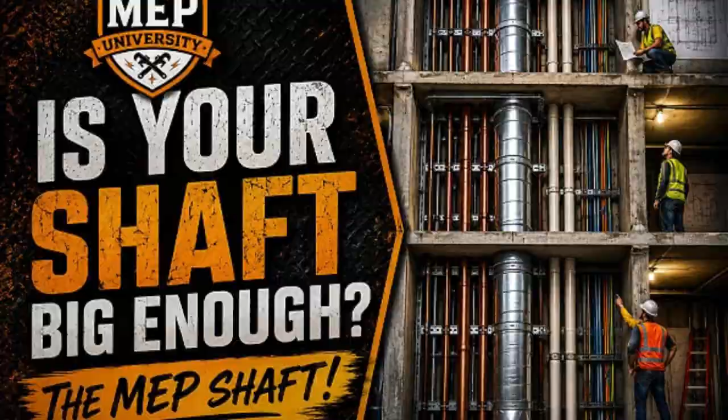You think your shaft's big enough? It's probably not. Stick with me and I'll walk you through the 5 biggest mistakes contractors and designers make when they plan MEP shafts in buildings.

Before we get going, let's talk about what a mechanical or utility shaft actually is. A shaft is a vertical opening in a building that lets mechanical, plumbing, electrical, fire protection, and other systems run from floor to floor. On big commercial projects, these shafts turn into some of the tightest, most fought over spots in the whole building. The first challenge is just figuring out what the shaft is supposed to really look like, and the information is scattered all over the place.

Architectural, structural, mechanical, plumbing, electrical, fire protection drawings, plus the BIM model. And here's the problem. They don't always match. The architects might show one shaft size, the mechanical engineer might show something different, the electrical engineer might need even more space than what's shown on any of the drawings. And I can almost guarantee you one thing, whatever's shown on the structural drawing is exactly what the concrete contractor is going to frame up and pour.

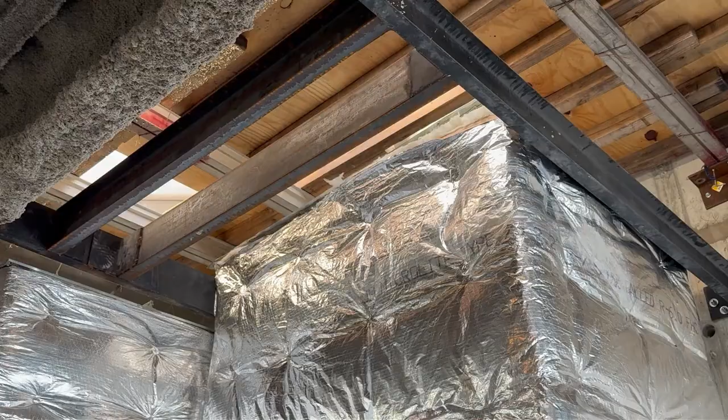So if that opening is wrong, too small, or missing the support it needs, you're going to be living with that problem for the rest of the project. That's why PMs, foremen, superintendents, and coordinators need to start reviewing shafts really early. They need to check the drawings, check the model, verify slab openings, and make sure that what's being designed can actually be built. So let's dive into the 5 biggest mistakes contractors and designers make when they plan and install MEP shafts.

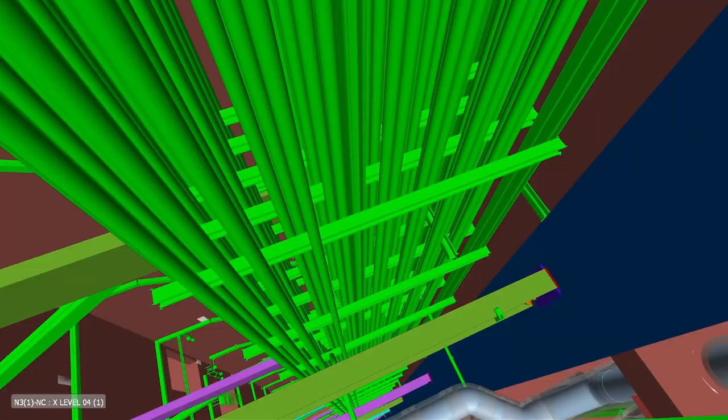Mistake number 5. Nobody plans for the shaft steel. On a lot of large commercial projects, the engineer will lay out the piping, the ductwork, and the conduit in the shaft in the model, but very little thought goes into what all this stuff is actually going to sit on or hang from. A lot of times the shaft steel isn't even shown at all. The design team may not have coordinated it with the structural drawings.

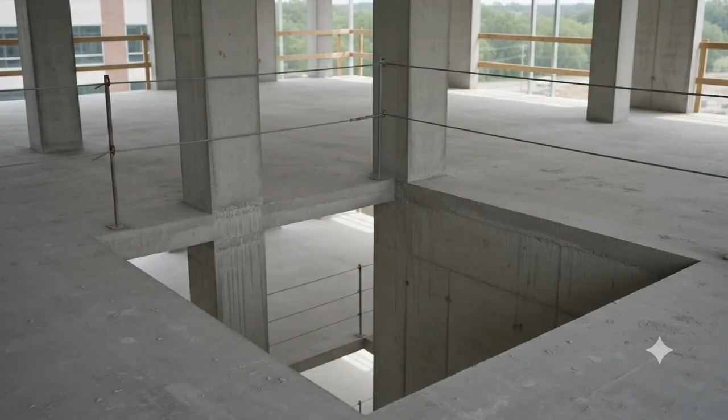They may not have calculated any of the weights. They may not have even calculated the insulation thickness or fully realized that the mechanical, plumbing, electrical, and the fire protection are all sharing the same space. And then construction starts. Now, somebody has to figure out, how much steel do we even need? Who's going to design it? Who's paying for it? Who's going to fabricate it? And who's going to install it?

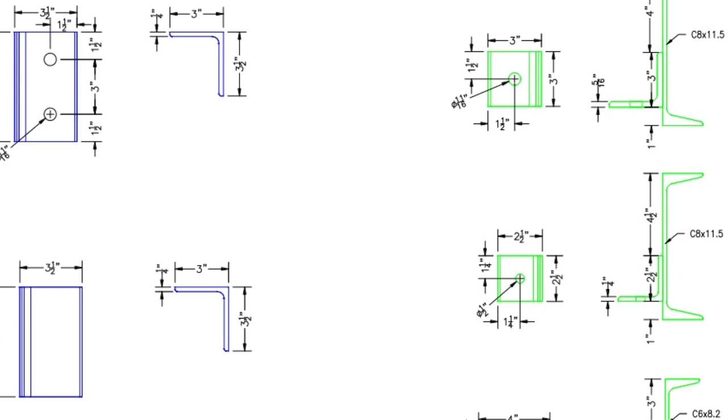A lot of the specs push this onto the contractor through what they call delegated design. Miscellaneous metals rarely carries it in their scope, and the GC usually will just tell you it's yours. And all of a sudden you're chasing engineered drawings and stamped calcs that should have been talked about months ago. Now that steel has to be sized, loaded, and it's going to probably hold thousands of pounds of pipe, duct, conduit, and sometimes even has to be sized enough to have vibration isolation sitting on it.

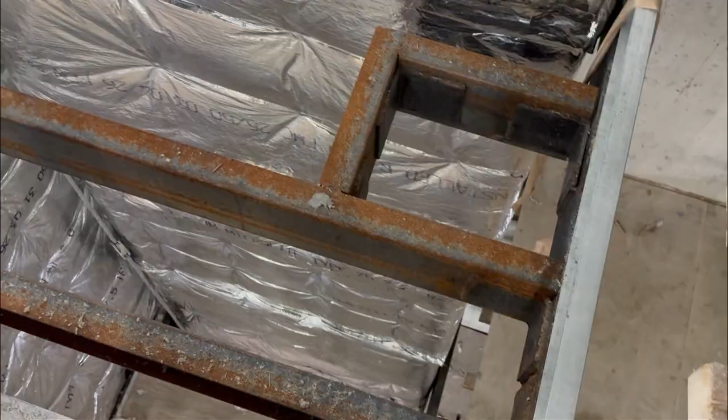You've also got to go figure out, do you need embeds in the concrete? Is the slab opening even big enough to take the steel? Will the support steel even fit through the opening? What loads will the support see? Can unistrut handle it, or do you need angle iron, maybe C-channel, or maybe even structural steel?

And here's the bigger problem. What if the slab opening really isn't big enough? What if you need embeds cast into the concrete? What if utility weights call for bigger members than anybody's planning for? Those are questions you don't want to be asking after the concrete's already poured.

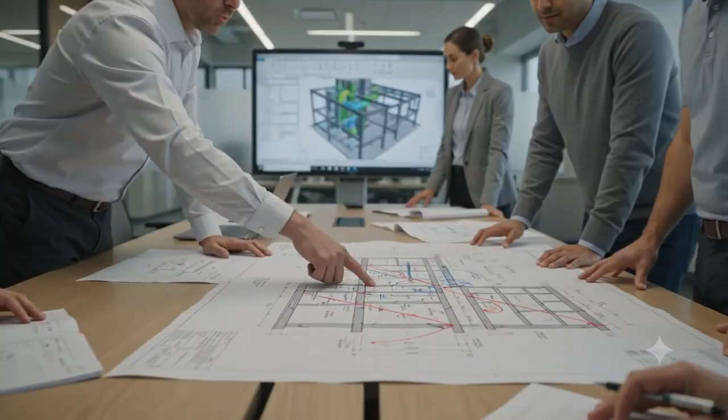My advice is, get your drafters and engineers looking at the shaft support requirements as early as possible. Even if the final design isn't done, you need to understand the concept, the loading, and the space it takes before the building even starts going vertical. Everybody coordinates the utilities. Very few people coordinate what the utilities are going to be sitting on.

Mistake number 4. Nobody plans for the fire-rated enclosures. This one gets overlooked all the time. The engineer will lay out grease duct in the shaft and everything looks great in the model or on paper. The BIM model says it fits. The shaft dimensions work. Everybody moves on, and then construction starts. The grease duct goes in and somebody realizes it still needs a 2-hour fire-rated enclosure around it.

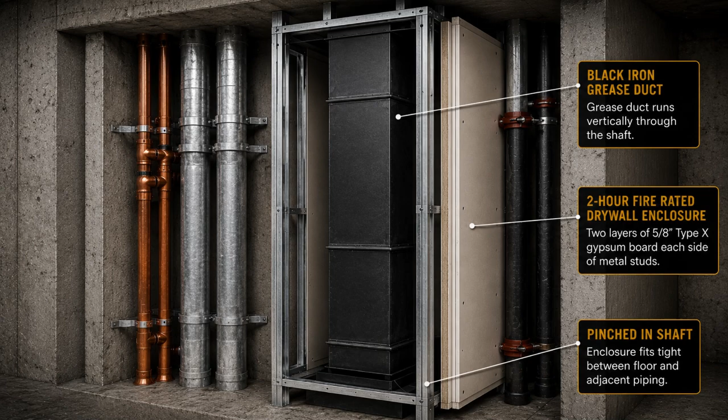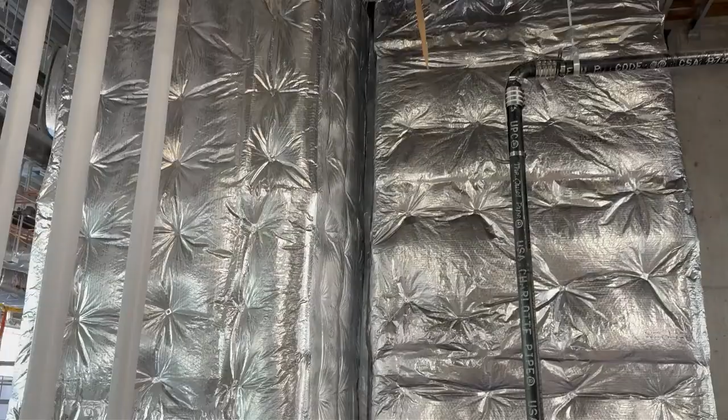Sometimes that's fire wrap and sometimes it's a drywall shaft enclosure. And a lot of times, neither one was shown fully or accounted for in the original design. Now, that duct looks fine on paper, but it suddenly needs extra thickness, support, framing, room to install it, and inspection clearances. I've seen shafts so tight you couldn't even get your hands around the duct to install the fire wrap. The duct fit, the fire wrap didn't.

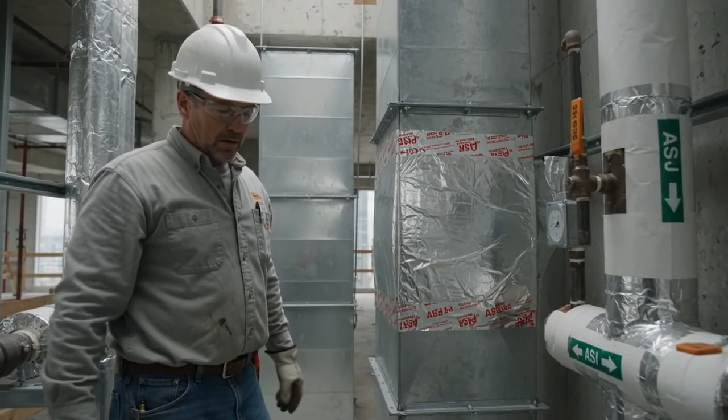And when a drywall enclosure is required, it gets even worse. Now you need framing, drywall, extra clearances, inspection access, and room for hangers and supports. The problem isn't just the enclosure itself. The problem is nobody accounted for the finished assembly. What looked fine on the plan can be impossible to build in the field.

My advice? Don't coordinate the duct, coordinate the finished assembly. The inspector isn't approving the duct, he's approving the complete fire-rated system. Don't just model the duct, model the finished product, whether it's fire wrap or drywall.

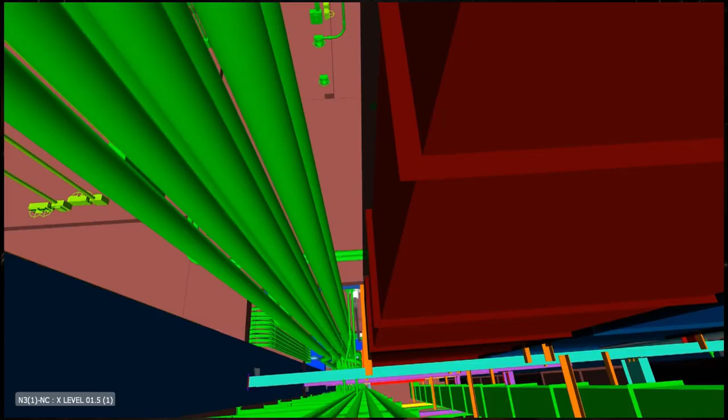Mistake number 3. Nobody thinks about vibration isolation. This one catches a lot of mechanical teams off guard. The engineer lays out the piping and everything looks fine inside the shaft. The BIM model looks good, the clearances look good, everybody moves on. Then somebody starts reading the specs and realizes the piping requires vibration isolation.

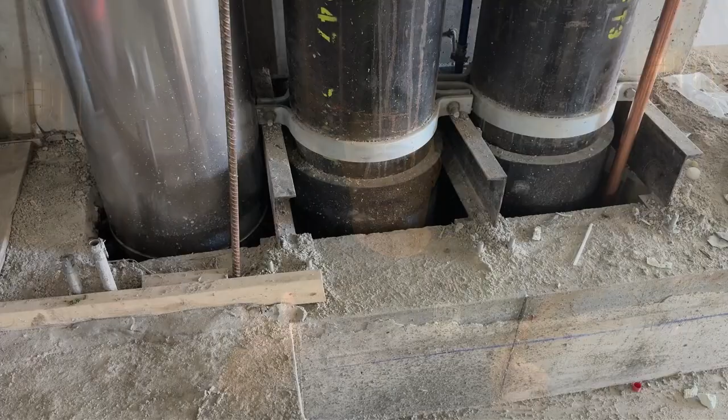Now the spring hangers need space, the isolation hardware needs space, the support steel might have to be modified, and all of a sudden that shaft isn't quite as roomy as it looked during design. The pipe fit, but the vibration didn't. The problem is a lot of teams coordinate the utility itself, but they don't coordinate everything that it takes to support it. Those spring hangers take up a lot of space depending on the size of the pipe.

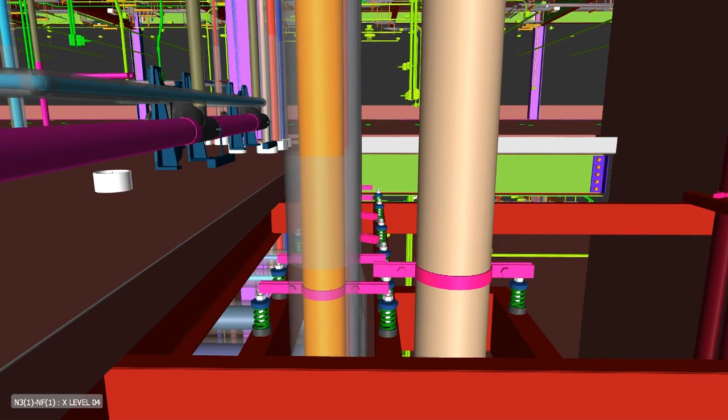Seismic restraints can take space, trapeze hangers can take space, support steel itself takes space, and all of it has to live right alongside the plumbing, mechanical, electrical, and fire protection sharing that shaft. I've seen shafts where the pipe technically fit, but once the vibration isolation went in, the space disappeared quick. So my advice for this one is don't stop at the drawings. Read your specs. A lot of the biggest shaft coordination problems aren't hidden in the plans. They're actually in the spec book.

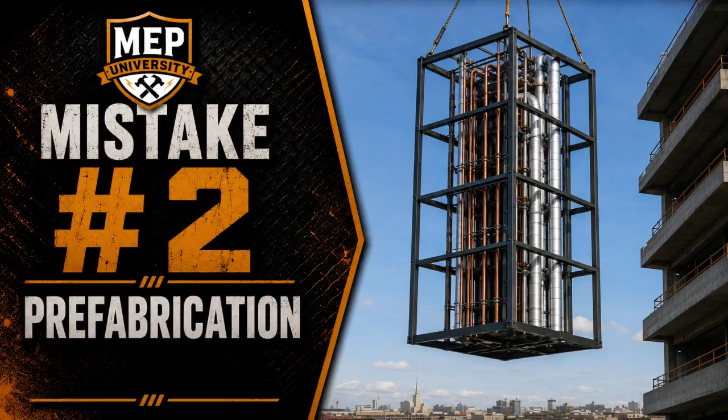Mistake number 2. Nobody thinks about prefabrication. When most people look at a shaft, they assume everything has to be built one piece at a time in the field. But that's not always true. Prefabrication doesn't have to mean building an entire shaft assembly. Sometimes it starts with something as simple as making your riser sections longer.

Let's say you're in a building that's a 20-story tall structure. Would you rather install 21-foot sections of pipe or 42-foot sections of pipe? Double the length and you've just cut the number of welds or couplings or joints and inspections nearly in half. It's a huge labor savings.

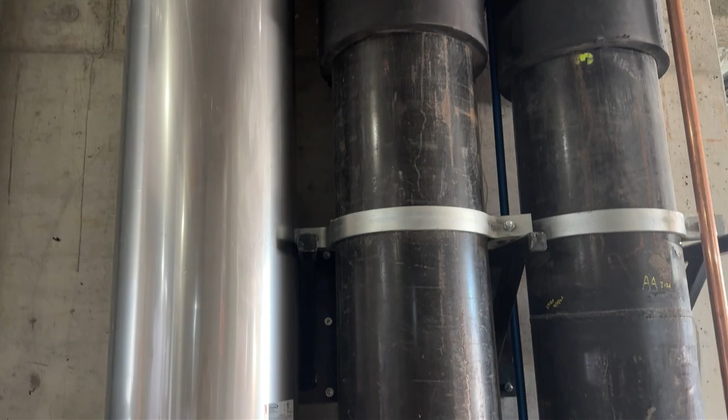Could you weld a few sections together on the ground and fly up bigger assemblies into place with the crane? Absolutely. But now you've got rigging, hauling, lifting, and logistics to plan out. The point is to think about prefab early. With enough planning, a lot of shaft assemblies can be built and set as bigger modules.

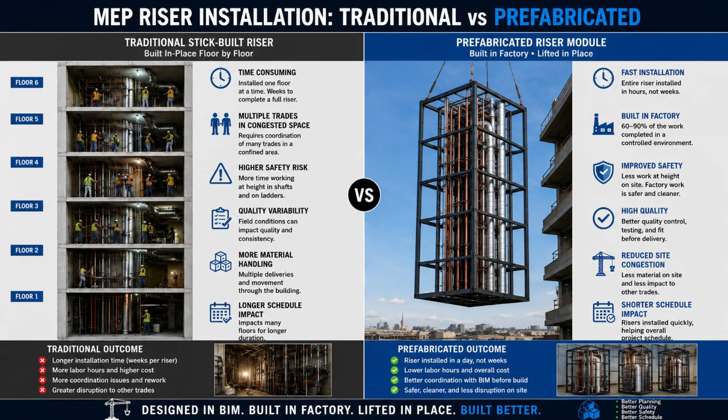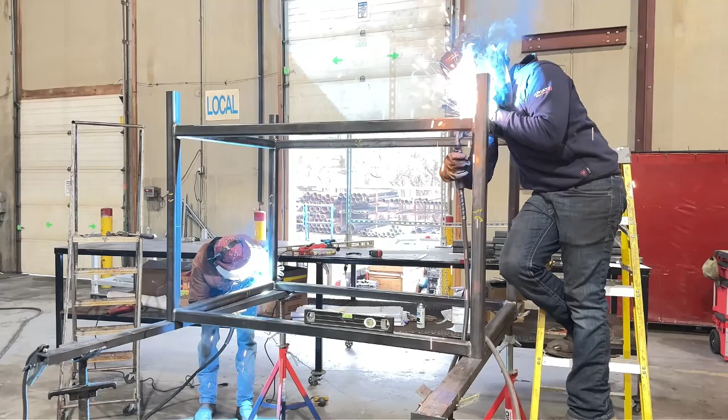I've seen contractors actually build complete riser assemblies, the pipe, the duct, conduit, supports, and structural framing in a fabrication shop and ship it to the site long before the building was even ready for it. Once the assembly was built, tested, inspected, and ready to go, they lowered the whole riser into the building and tied it off at each floor with the tower crane. To somebody walking by, it looked like the shaft went in overnight.

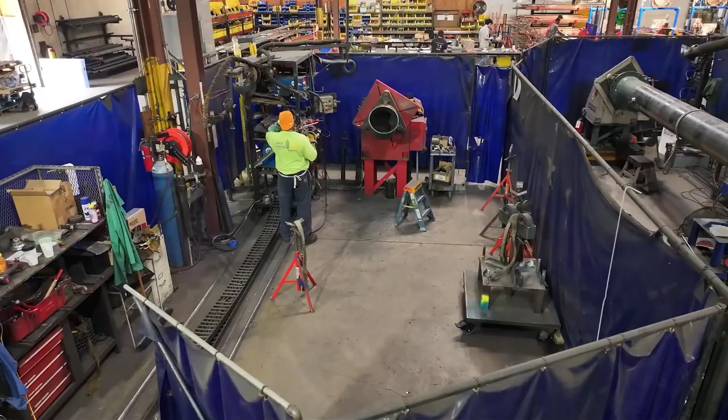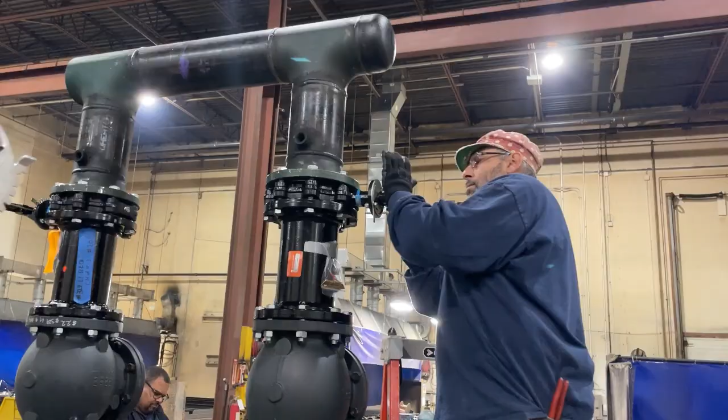But really, there were months of fabrication, quality control, testing, inspections, and a lot of coordination happening in a controlled shop long before that assembly ever showed up on site. That's the power of prefabrication. You're pulling labor out of a crowded shaft and putting it into a controlled environment where productivity, safety, and quality are usually a lot higher.

But prefab isn't free. It takes planning. Somebody's got to engineer the structural cage, design the assembly so it can be picked up by a crane. You've got to think, how am I going to haul it there? You need a rigging plan. And usually you need buy-in from the owner, the inspectors, and the GC before you can even move forward. Prefab may not make sense on every project, but it should always be on the table.

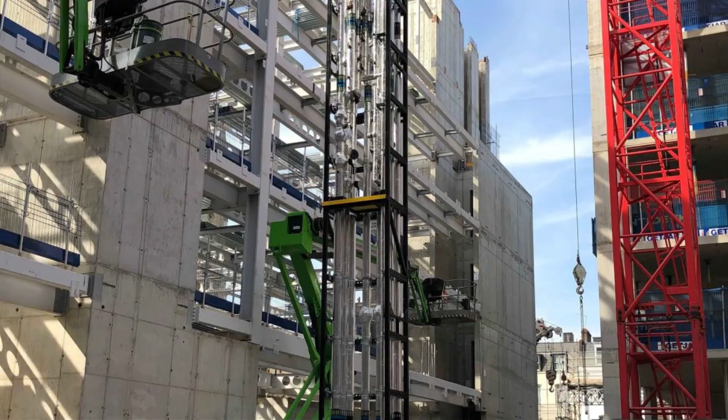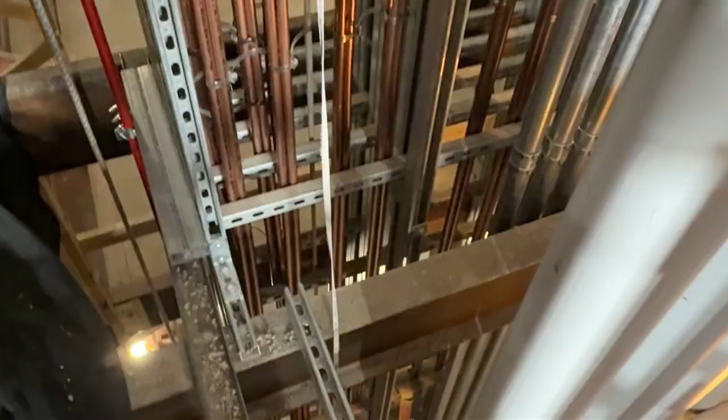Even if you're just prefabbing sections of pipes or prefabbing the supports or maybe some of the sections of the duct, every single hour you pull out of that field and put into a controlled shop buys you productivity. My advice is, at least ask the question, can this shaft be fabbed? Because if the answer is yes, you might save a lot of labor, cut the schedule risk, raise your quality, and even save a lot of money in the long run. Sometimes the fastest way to build a shaft is not to build it in the shaft at all.

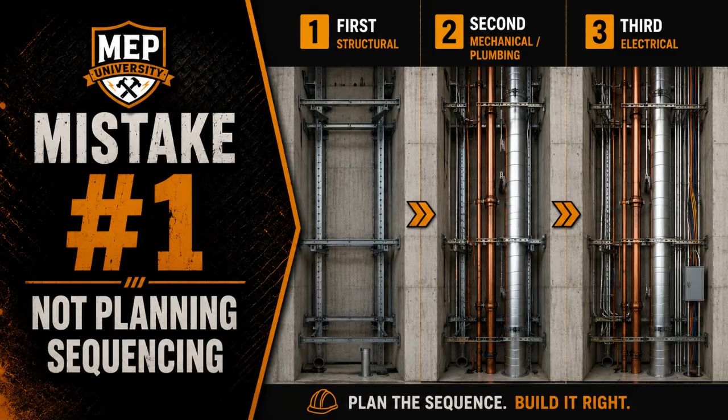And finally, mistake number 1. Nobody thinks about sequencing. And in my humble opinion, this is the biggest one of them all. Most people look at the shaft and ask, will everything fit?

Experienced teams ask different questions. How are we actually going to build it? The challenge isn't really fitting the utilities into the shaft sometimes. The challenge is understanding how long each step takes and what depends on what.

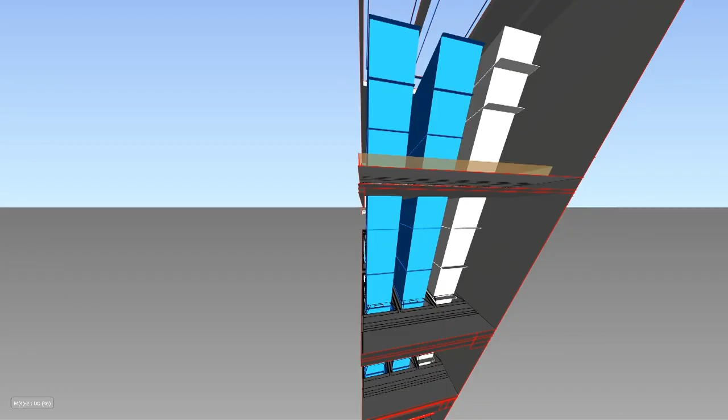Let's say your plumbing and HVAC risers run all the way from the bottom of the building to the roof. Those systems usually have to be fully installed before you can pressure test them. Depending on the size of the project, testing a riser can take days or even a week or more. And while that's happening, other work has to wait.

Same thing with grease duct. A lot of jurisdictions require grease duct risers to be light tested before they're accepted. If the shaft gets really crowded with other utilities before the testing's done, the whole thing gets a lot harder. And once the shaft gets crowded, installing fire wrap, insulation, supports, and everything else gets even tougher.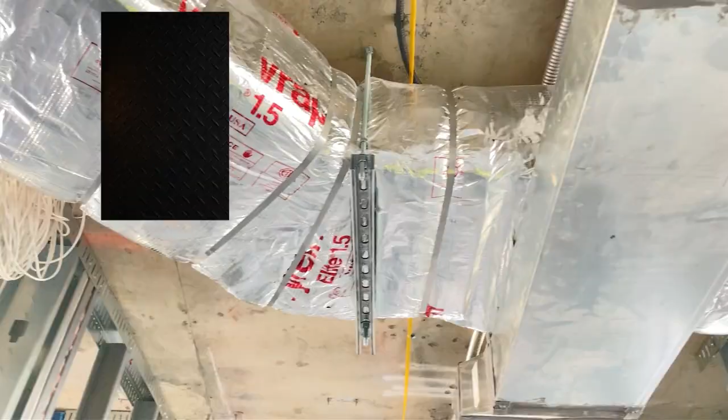I've seen grease duct that required 2 layers of fire wrap with metal banding every 12 inches. And that means the installers need enough room to physically get their hands around that ductwork to do the work. And if the shaft's too tight, what looks good on paper can be impossible to build.

Sometimes the duct isn't wrapped at all. Instead, it needs a 2-hour drywall enclosure. Now you're adding framing, drywall, taping, mudding, fire caulking, and plenty of inspections. And a lot of times that enclosure has to be done before the next trade can even start their work.

Same goes for insulation. Duct and piping insulation usually can't even start until the testing's complete. And if the shaft isn't protected from weather, that insulation's either going to get wet or it has to wait to be installed till later.

A lot of duct sealants are specified on jobs to be low VOC water-based. That means if they get wet from rain, they wash right off, and the building's not usually dried in that early on the job. So that's why temporary roofs, weather protection, waterproofing plans, they need to get talked through early with the GC before you even start working on those shafts.

This is where projects get into big trouble. One trade isn't waiting on another trade to install their work. They're waiting on them to install it, test it, inspect it, wrap it, insulate it, and then finish it. Those are very different durations.

I've seen GC schedules that assume every trade's working in the shaft at the same time. In reality, a lot of shafts have to be built one trade at a time. If you don't plan the sequence right, you can end up with a shaft that can't even be built. So how do you avoid that?

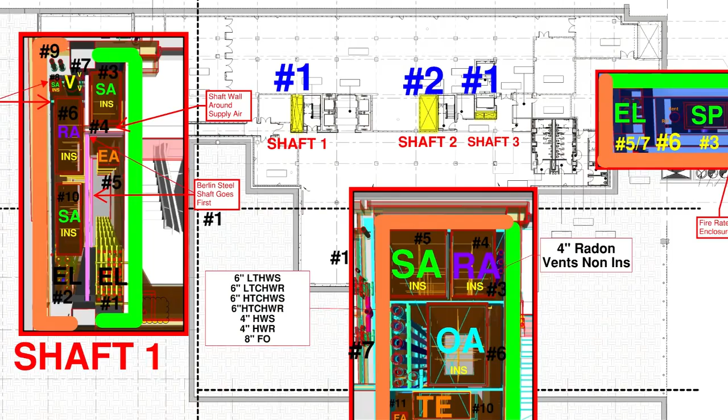Well, on this project we're looking at, we actually used the BIM model and the floor plans to map out how we thought the shafts would actually get built. We figured out which utilities went in first, which systems needed to be tested, which ones needed to be insulated, and where each trade needed access through that whole installation process.

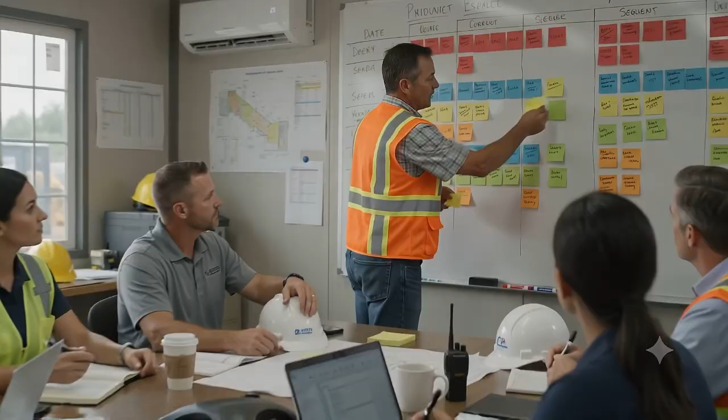But the model was really just the first step. After we built the sequence, we held pull planning sessions with the GC, the foreman, and the trade partners to nail down real durations for each step of those shafts. How long would the testing take? How long would inspections take? How long would insulation take? When could the next trade safely get into that shaft while we were still working or finishing up our work?

Those pull planning sessions helped us coordinate not just how we were going to build these shafts, but how long it was actually going to take. It took a few planning sessions to get everybody on the same page, but at the end of the day, it worked. The model showed us where everything fit. The pull planning showed us how everything was actually going to get built, and it really worked well.

So my advice: get the trades in the room early, walk the model, talk through the install, build the sequence, and set a realistic time frame. Everything works on paper at first. And if you don't plan early, you're bound to hit some big surprises.

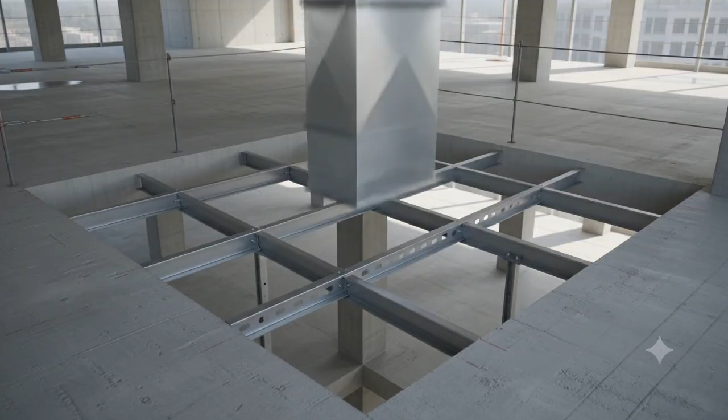And those surprises can cost tens of thousands of dollars, blow up the project schedule, and make life miserable for everybody involved. But with the right planning, coordination, and sequencing, you can save a ton of time, potentially save a ton of money, and do all of that before construction even begins. Remember, good planning saves time, it saves money, and it keeps projects moving forward and on schedule.